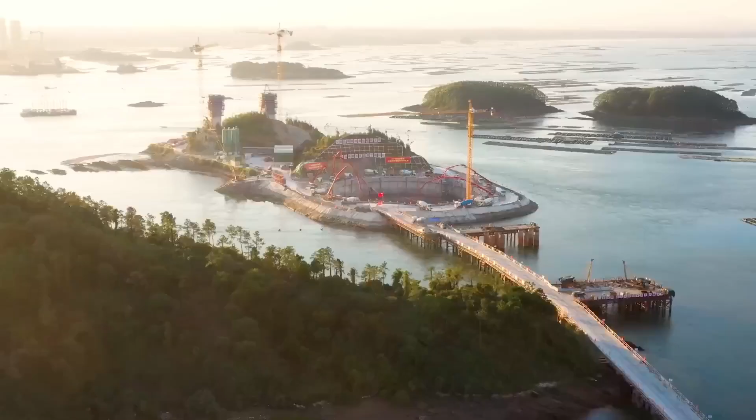In the 21st century, China has emerged as a global leader in infrastructure and engineering, achieving feats that have astonished even the most developed nations. Once plagued by the hardships of the century of humiliation, China has now risen to become an economic and technological powerhouse, transforming its cities and landscapes with massive construction projects.

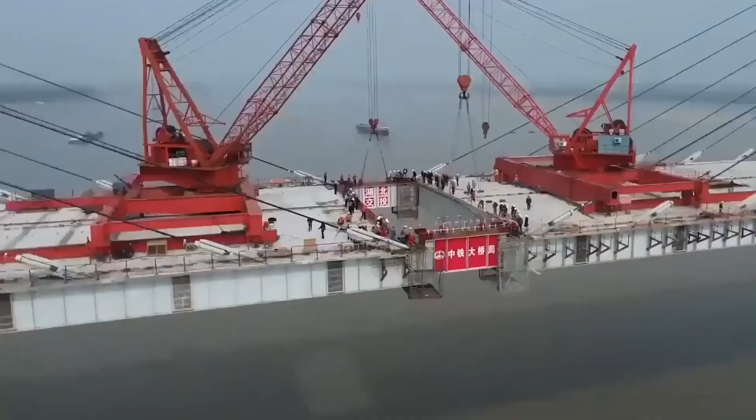Former U.S. President Donald Trump even acknowledged China's superiority in infrastructure, admitting that America could never compete with China's advanced roads, bridges, and urban development. But is this reputation well-earned? Is China truly surpassing the West in engineering and technological innovation, or is it just an illusion created by grandeur and large-scale projects?

To answer this, one of the most groundbreaking projects to examine is the Shenzhen-Zhongshan Link, a massive infrastructure development that features bridges, artificial islands, and one of the world's longest underwater tunnels. This 24-kilometer megastructure is not just a testament to China's ability to construct monumental projects, but also a symbol of its commitment to economic growth, regional integration, and technological advancement.

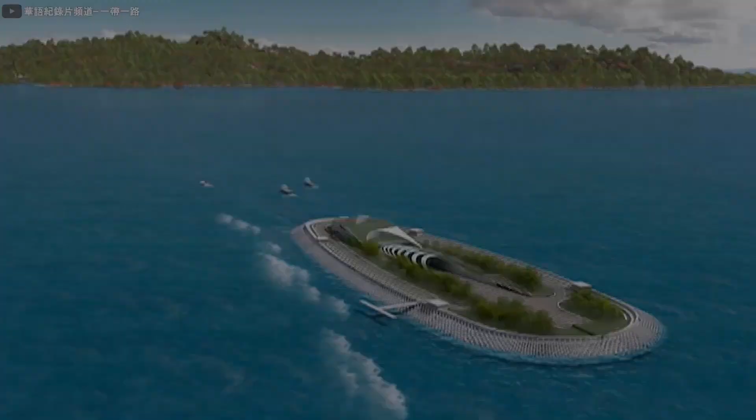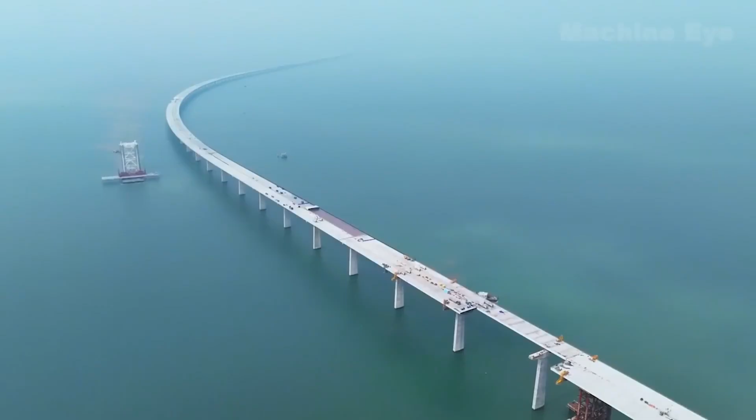The Shenzhen-Zhongshan Link is a vital part of the Guangdong-Hong Kong-Macau Greater Bay Area, a region that aims to become one of the most important economic hubs in the world. China is home to some of the world's busiest and fastest-growing cities, and Shenzhen is one of its most important economic powerhouses. Often referred to as China's Silicon Valley, Shenzhen is a global leader in technology, finance, and manufacturing, housing some of the biggest companies in the world, such as Huawei, Tencent, DJI, and BYD.

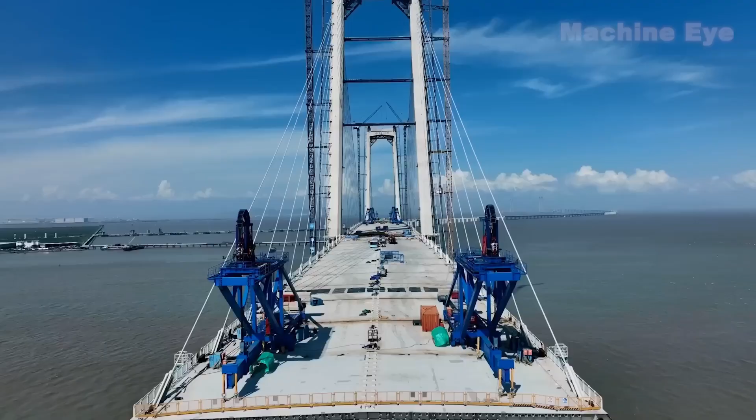It is also home to the Shenzhen Stock Exchange and a booming fintech sector. The city plays a critical role in international trade, with its ports processing massive cargo volumes and serving as an essential link in global supply chains. As a rapidly growing metropolis, Shenzhen requires efficient and modern transportation networks, which is why the Shenzhen-Zhongshan Link is so significant.

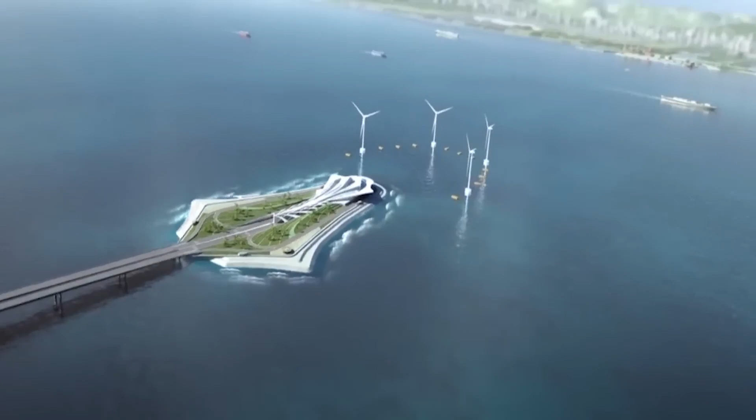On the other side of the Pearl River Delta, Zhongshan is an equally vital player in China's industrial landscape. While Shenzhen is known for its high-tech industries, Zhongshan is a key manufacturing and trade hub, specializing in machinery, home appliances, and precision equipment. The city is home to over 30,000 industrial enterprises, many of which are deeply integrated into global supply chains. Zhongshan is also undergoing rapid modernization as part of the Greater Bay Area initiative, attracting new businesses and infrastructure investments.

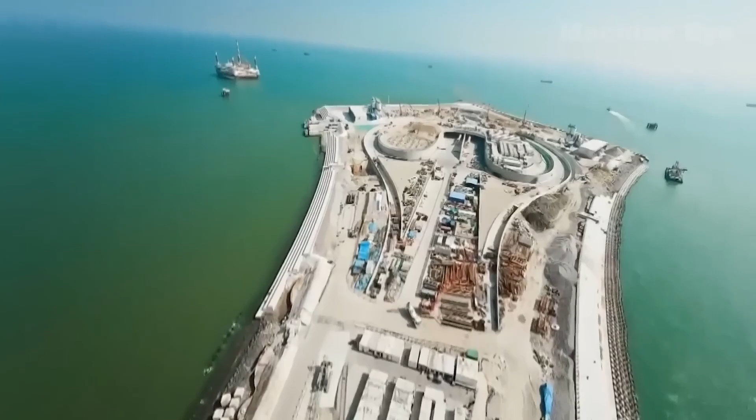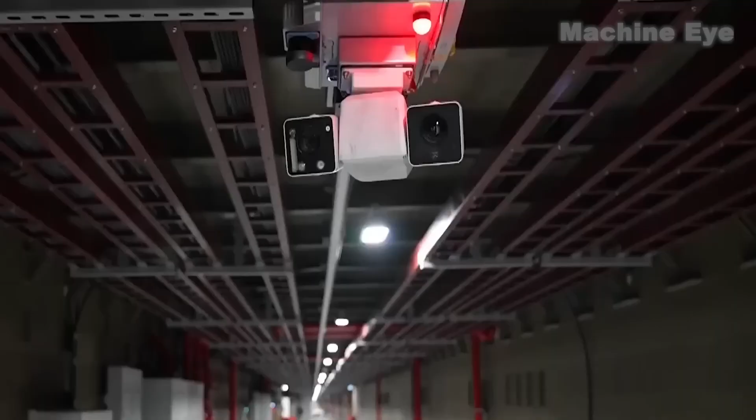However, the lack of a direct connection between these two economic hubs has been a major challenge. Before the construction of the Shenzhen-Zhongshan Link, the primary travel routes between the two cities included the Humen Bridge or ferries, both of which were heavily congested. The long travel times of 2 to 3 hours created logistical bottlenecks for businesses and daily commuters. The new link cuts this travel time to just 30 minutes, significantly enhancing commerce, reducing transportation costs, and strengthening economic ties within the Greater Bay Area.

The sheer scale and complexity of the Shenzhen-Zhongshan Link make it an engineering marvel. The project consists of a 17-kilometer bridge system extending across the Pearl River estuary, featuring 2 massive artificial islands that serve as key transition points. From there, the structure descends into a 6.8-kilometer underwater tunnel, making it one of the longest and most advanced immersed tunnels in the world. What makes this tunnel even more unique is the integration of a submarine interchange, an unprecedented engineering feat that allows vehicles to seamlessly shift routes while underwater. This is the first of its kind in large-scale civil engineering.

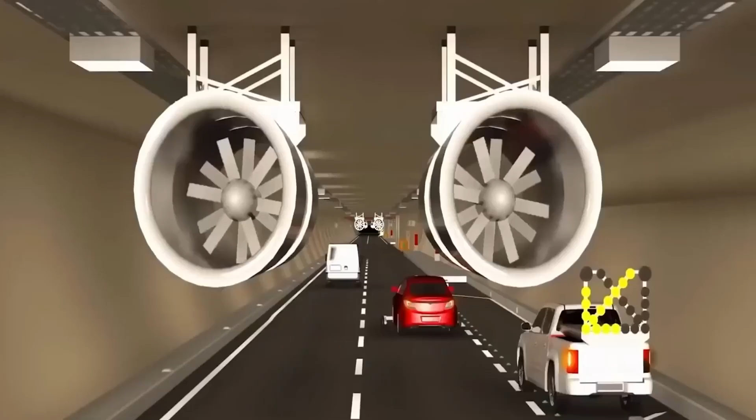The construction of the Shenzhen-Zhongshan Link required some of the most advanced engineering solutions ever deployed in infrastructure development. The underwater tunnel is composed of 32 massive prefabricated concrete segments, each weighing over 80,000 tons. These segments were carefully submerged and aligned on the seabed with millimeter precision. To ensure long-term durability, engineers incorporated seismic-resistant technology capable of withstanding extreme environmental conditions, including typhoons, strong tides, and potential earthquakes. Given the frequent geological activity in the Pearl River Delta, this was a crucial consideration.

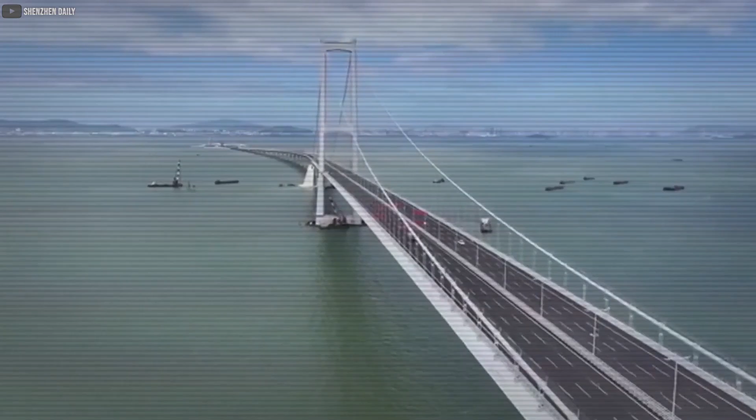Beyond its structural components, the artificial islands serve multiple purposes. In addition to facilitating the transition between bridges and the underwater tunnel, these islands house essential infrastructure such as emergency response centers, toll stations, and logistics hubs. Sustainability has also been a major focus of the project. To minimize the ecological impact on the Pearl River Delta's fragile marine ecosystem, engineers employed noise reduction materials and environmental protection measures throughout the construction process.

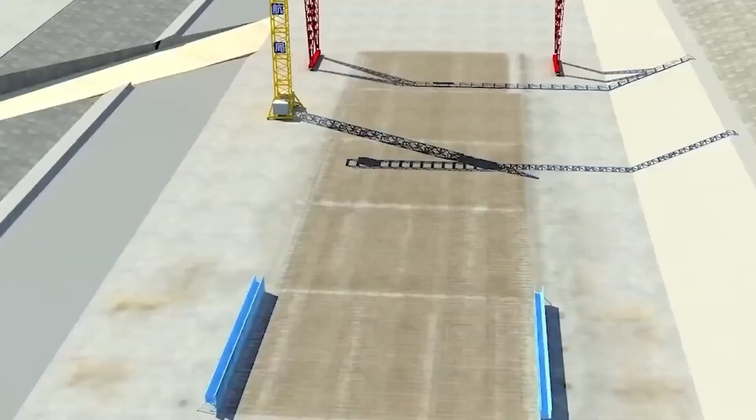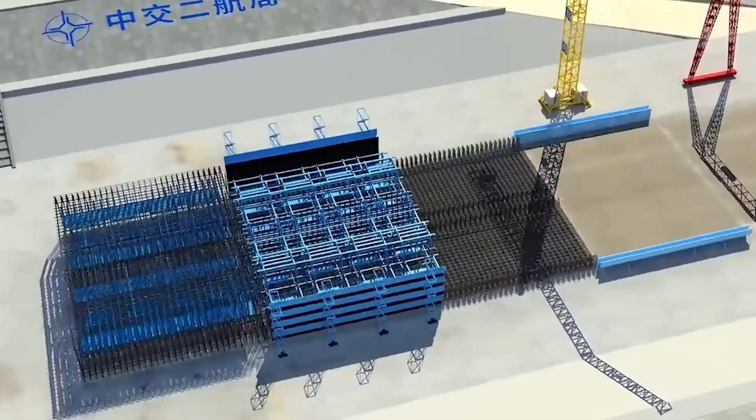The Shenzhen-Zhongshan Link is a testament to China's ability to push the boundaries of engineering, integrating cutting-edge technology, sustainability, and urban planning into a single megastructure. The undersea tunnel, in particular, is a technological breakthrough, redefining the limits of marine engineering and tunnel construction. Stretching 6.8 kilometers beneath the Pearl River estuary and buried at depths of over 40 meters, it stands as one of the most ambitious underwater infrastructure projects ever attempted. Designed with 4 lanes in each direction, it far surpasses the capacity of the Hong Kong-Zhuhai-Macau Tunnel.

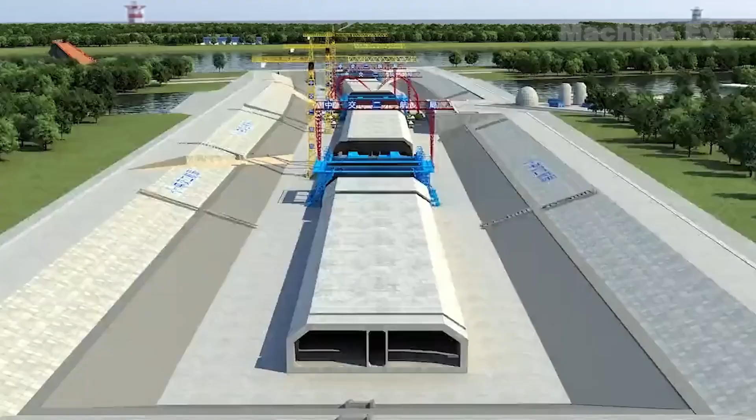Building an undersea tunnel of this scale presented enormous challenges, particularly in ensuring airtight connections between segments in a high-pressure underwater environment. Even a minor leak could compromise the tunnel's long-term durability. Engineers tackled this issue by designing precision-machined steel gaskets combined with high-performance elastic sealing materials, ensuring vacuum-tight seals between segments.

Each segment, measuring 165 meters in length, 46 meters in width, and 10.6 meters in height, was meticulously aligned using a floating docking system with a 2 mm margin of error, surpassing conventional tunnel construction standards.

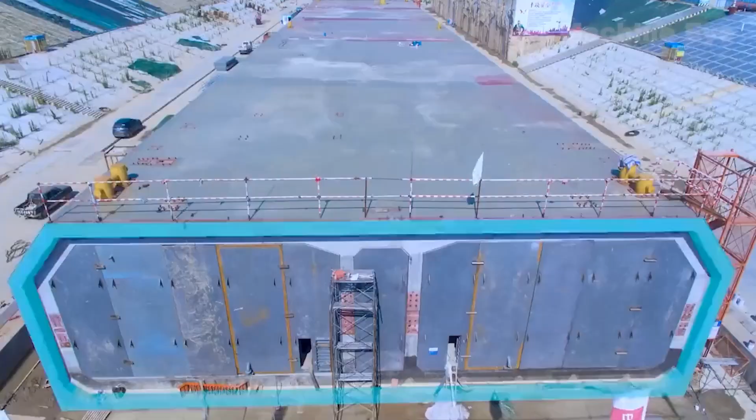Another major challenge was ensuring seismic resilience. Since the Pearl River Delta is prone to geological activity, traditional expansion joints were deemed too vulnerable. To address this, engineers introduced highly flexible, seismic-resistant expansion joints that allow the tunnel to absorb and dissipate seismic energy effectively.

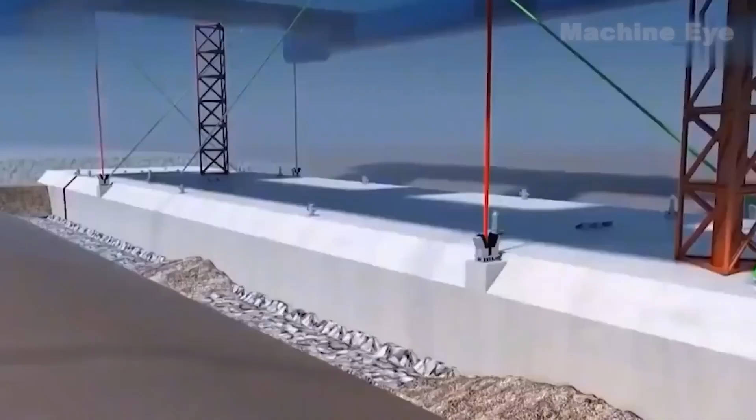In addition to structural resilience, the tunnel also incorporates an advanced air purification and ventilation system, featuring HEPA filters and real-time carbon dioxide monitoring sensors. These innovations help maintain air quality inside the tunnel at levels comparable to outdoor conditions.

The Shenzhen-Zhongshan Link is more than just a transportation corridor. It is a bold statement of China's engineering ambitions. This project has defied Western skepticism, proving that large-scale, high-tech infrastructure can be built with precision, resilience, and sustainability.

By successfully overcoming complex engineering challenges, China has once again demonstrated its ability to execute monumental projects that redefine global infrastructure standards. As the Shenzhen-Zhongshan Link nears completion, it stands as a symbol of the country's ongoing commitment to economic growth, technological progress, and regional connectivity.

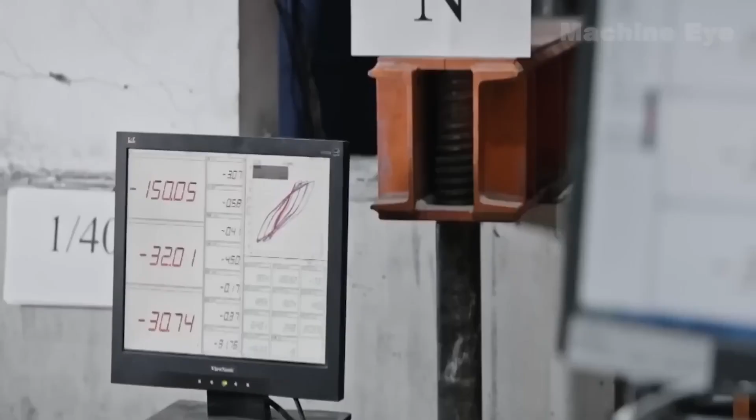The Shenzhen-Zhongshan Undersea Tunnel is a marvel of engineering, operating in a seismically active zone. To counteract buoyancy forces, engineers implemented an anti-buoyancy foundation system using a combination of deep-sea anchor piles and ultra-dense reinforced concrete. Given that each submerged segment weighs more than 80,000 tons, keeping them stable without external displacement was critical.

Compared to the Hong Kong-Zhuhai-Macau Bridge Undersea Tunnel, where anti-buoyancy was managed with traditional ballast systems, the Shenzhen-Zhongshan Link's approach provides 40% greater stability against shifting seabed conditions. Moreover, the estuary experiences some of China's strongest tidal currents, with speeds reaching 2.5 meters per second.

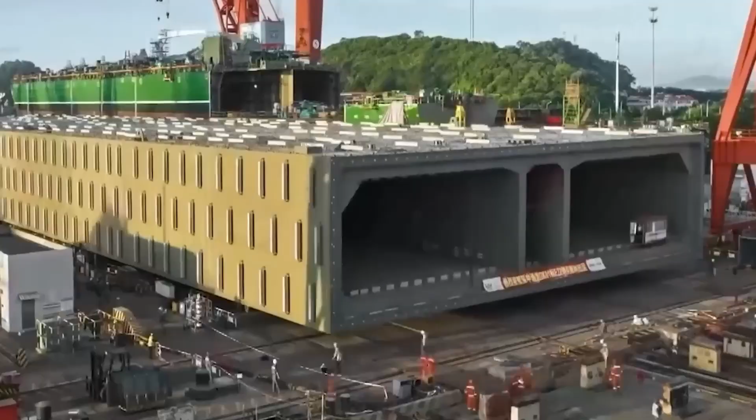To protect the tunnel from erosion and shifting seabed conditions, engineers used an advanced sediment stabilization system integrating reinforced geotextile layers and dynamically adaptive breakwaters. This ensures that underwater currents do not gradually weaken the tunnel's foundation over time, a common issue in submerged infrastructure projects like the Øresund Bridge Tunnel between Denmark and Sweden.

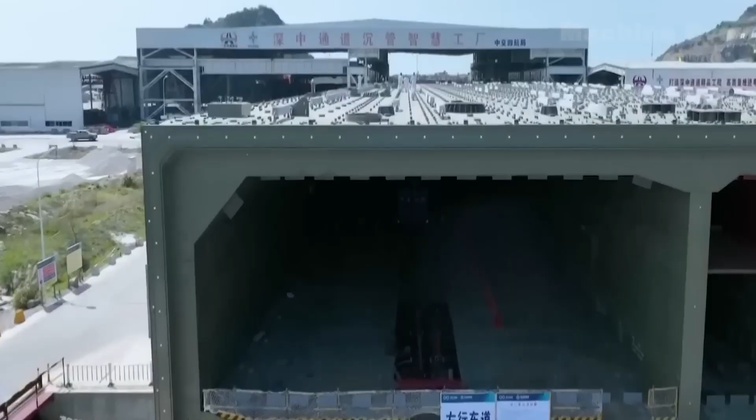What truly sets this tunnel apart, however, is its unprecedented technological sophistication. At its core lies a groundbreaking smart monitoring system integrating 23,000 fiber optic sensors directly into the tunnel's concrete structure. These sensors provide real-time stress, strain, and temperature data, allowing engineers to detect microfractures, monitor load distribution, and predict structural fatigue before it becomes a safety risk.

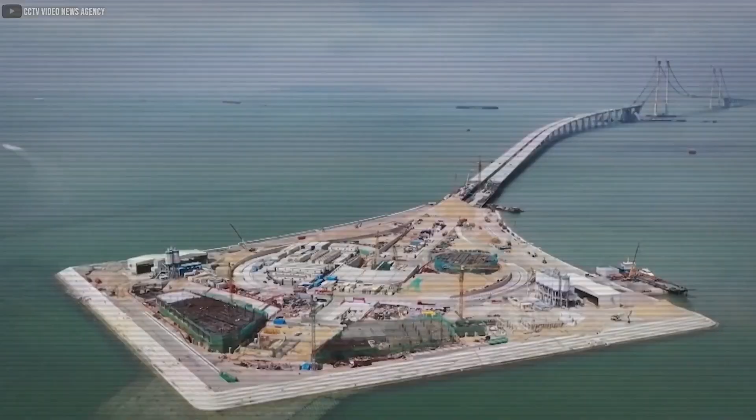This level of continuous automated health monitoring is a first for undersea tunnel construction and enhances long-term durability by enabling preemptive maintenance before major issues arise. The precision and sensitivity of this monitoring system are unparalleled. The fiber optic sensors embedded within the tunnel boast a 40% higher sensitivity than comparable systems used in the West.

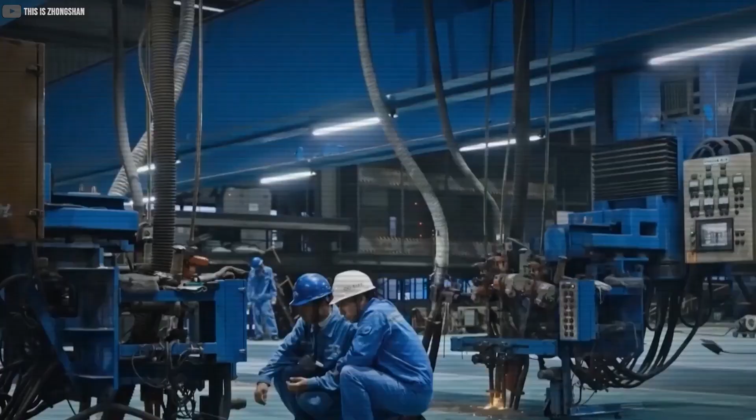This allows for more accurate and immediate data collection, effectively making the concrete think. This feat is so revolutionary that it was recognized by the prestigious journal Nature. The integration of smart sensing technology into traditional concrete structures transforms the tunnel from a static passageway into a self-diagnosing, self-reporting structure, significantly reducing maintenance costs and extending its lifespan.

Beyond its sheer scale and technological breakthroughs, the Shenzhen-Zhongshan Undersea Tunnel also sets a new benchmark in environmental protection and human safety. Given the ecological sensitivity of the Pearl River estuary, home to diverse marine life including the endangered Chinese white dolphin, engineers implemented low-noise construction techniques to minimize underwater sound pollution.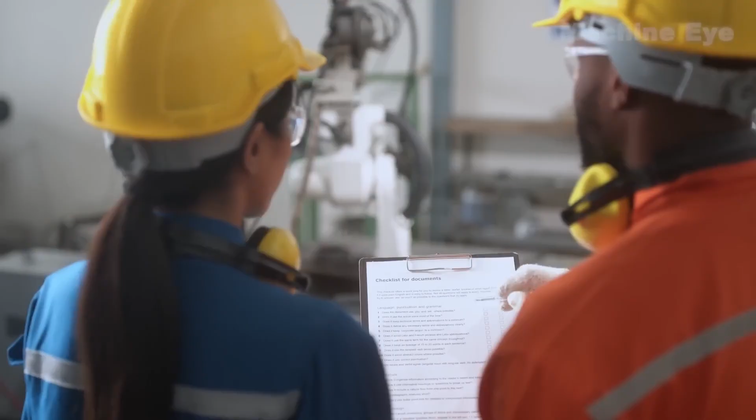They pioneered a steel-concrete composite structure, combining the best of both worlds. The steel shell provided superior tensile strength and flexibility, preventing cracks from propagating through the structure, while the concrete core enhanced compression resistance, ensuring the tunnel could withstand the staggering weight of ocean water above.

This combination resulted in a 400% increase in flexural rigidity, meaning the tunnel was 4 times more resistant to bending and deformation compared to conventional designs. This steel shell concrete structure was a complete reimagining of how undersea tunnels are built.

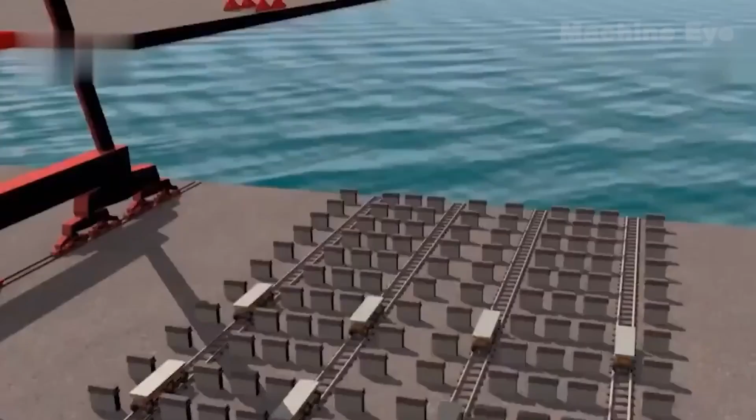Traditional reinforced concrete requires extensive manual labor, making large-scale projects more time-consuming and error-prone. The new steel-concrete hybrid design dramatically reduced labor intensity, allowing prefabricated segments to be built with millimeter precision before being submerged and connected on the seafloor.

This breakthrough did more than silence skeptics. It set a new benchmark for tunnel engineering worldwide. By demonstrating that an 8-lane bidirectional undersea tunnel was not only feasible but structurally superior to previous designs, China effectively rewrote the rules of large-scale marine infrastructure.

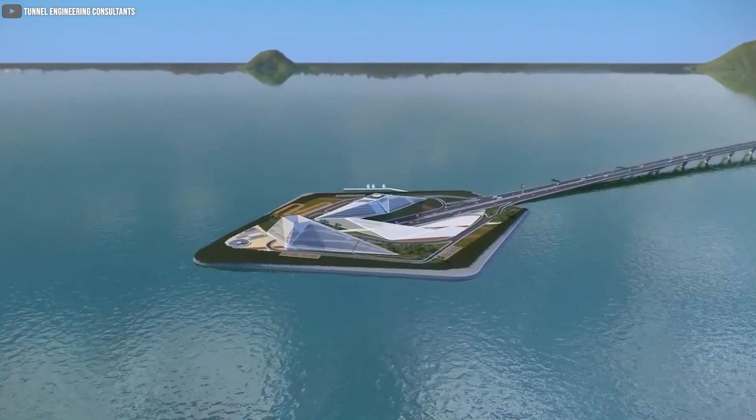This tunnel doesn't just connect 2 cities. It ushers in a new era of supermassive underwater infrastructure. To get a better sense of how impressive this tunnel is, we need to take a look at the tunnel's precision parameters, precision manufacturing, and assembly.

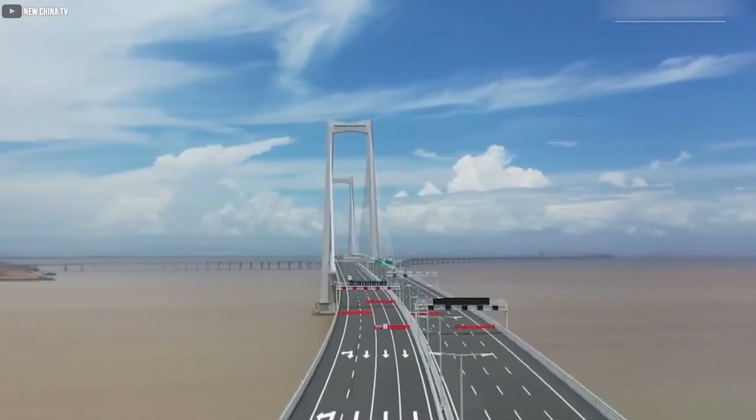The Shenzhen-Zhongshan Undersea Tunnel is a masterclass in precision manufacturing and automated assembly, pushing the boundaries of what is possible in subsea infrastructure. Traditional tunnel construction often relies heavily on manual labor, but for a project of this magnitude, even microscopic deviations in construction could lead to structural weaknesses over time.

To ensure unmatched durability and precision, China implemented an automated production process that surpassed even the most rigorous international engineering standards. At the heart of this operation was a highly automated production line where steel plates were precision-cut and robotically welded with an accuracy level never before achieved in immersed tunnel construction.

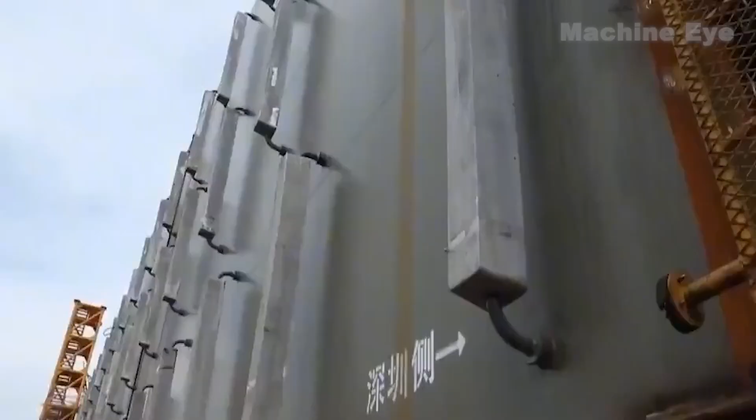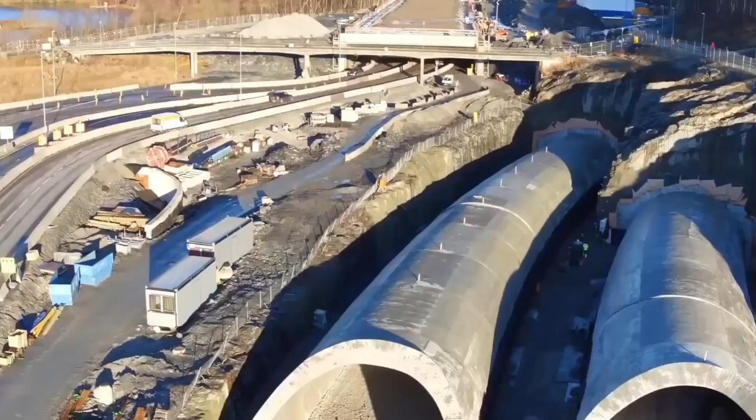The welding accuracy of 0.02 mm exceeded the German DIN 6700 standards, one of the world's most stringent quality benchmarks, by an astonishing 22%. This was a major breakthrough, as even a 0.1 mm deviation in tunnel segments could create misalignments that would compromise the structural integrity of the entire tunnel over time.

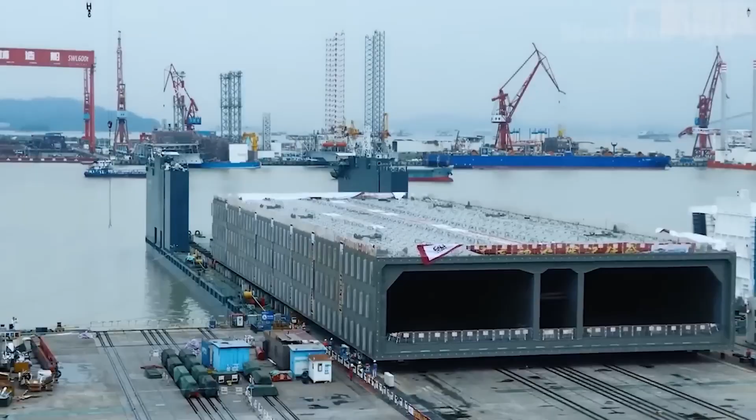To achieve this ultra-high precision, engineers employed laser-guided cutting systems to ensure millimeter-perfect steel plate dimensions. They also put to use automated robotic welding arms capable of applying consistent, high-strength welds without human error. Real-time AI monitoring systems also detected microscopic inconsistencies, allowing immediate corrections.

By eliminating human-induced welding imperfections, this approach dramatically improved the durability of the tunnel, ensuring that it could withstand extreme pressures for decades without significant maintenance. Given the sheer scale of the tunnel, a single continuous structure was impractical.

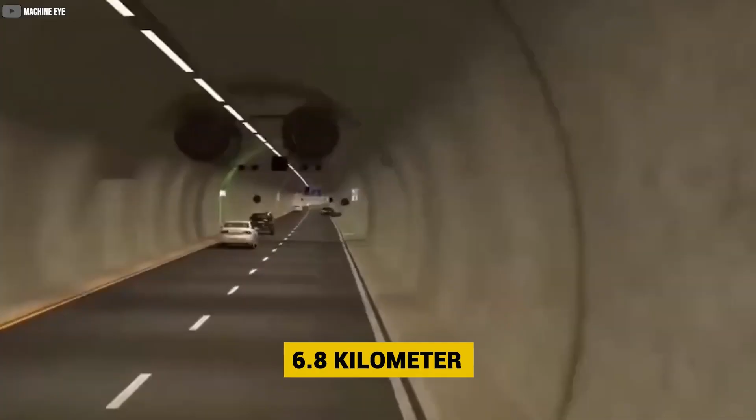Instead, engineers employed a segmented tube construction method, dividing the tunnel into 32 giant prefabricated segments, each weighing tens of thousands of tons. These segments were meticulously constructed off-site under controlled conditions before being transported and assembled underwater. To ensure flawless integration of these massive tunnel sections, the assembly process relied on gantry cranes capable of lifting and positioning entire tunnel segments with sub-millimeter precision.

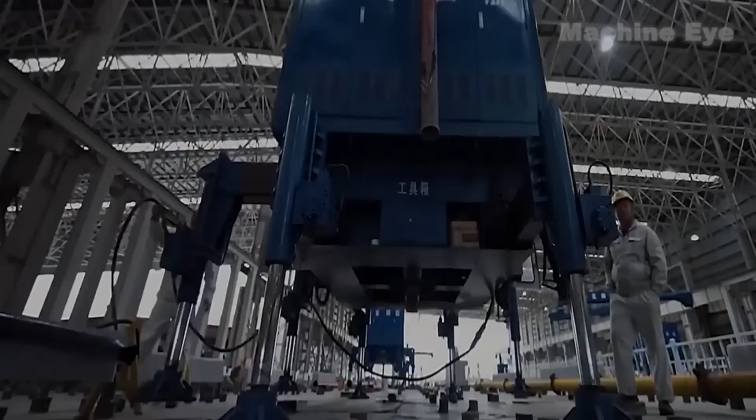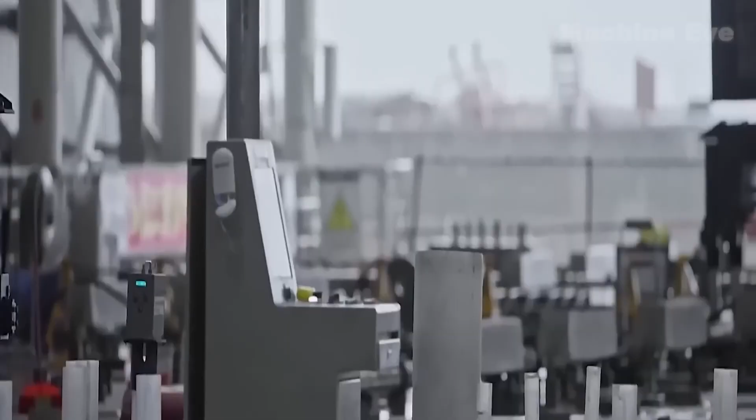Automated machinery also ensured that each segment was perfectly aligned before being permanently joined. Moreover, vacuum-sealed alignment systems eliminated even the slightest gaps between segments, reducing structural stress points. Each segment had to be airtight and watertight, as even a hairline fracture could allow seawater infiltration, jeopardizing the entire project. To mitigate this risk, engineers used custom-engineered high-pressure gaskets between tunnel sections, ensuring that the connections were as strong as the tunnel walls themselves.

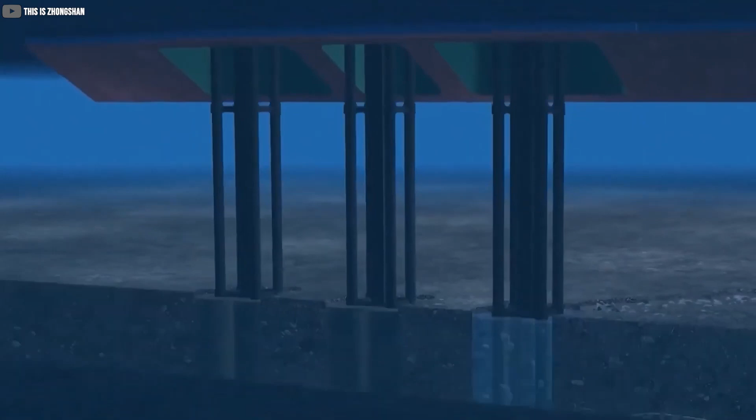The precision achieved in welding, cutting, and assembly has demonstrated that fully automated, AI-driven megaprojects are not just possible but superior to traditional manual construction methods. In this context, the Shenzhen-Zhongshan Link, a crucial passage connecting Shenzhen to Zhongshan in the Greater Bay Area, offers a glimpse into the next era of engineering innovation.

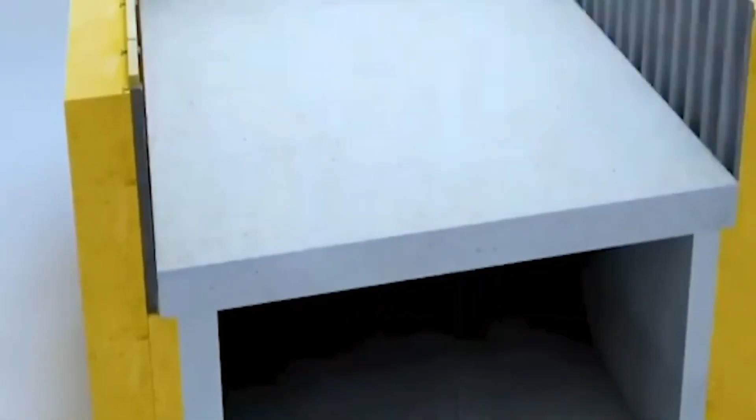Built to last 100 years, the tunnel is designed to endure severe marine conditions, high hydrostatic pressures, and continuous exposure to corrosive seawater. Achieving such an extended lifespan required groundbreaking innovations in corrosion resistance, structural protection, and self-maintenance.

One of the greatest challenges of underwater tunnel construction is the constant exposure to saltwater-induced corrosion, which can weaken metal and concrete over time. To counteract this, engineers developed a 5-layer anti-corrosion coating, drawing inspiration from shark skin, a natural surface known for its resistance to microbial growth, self-cleaning properties, and durability.

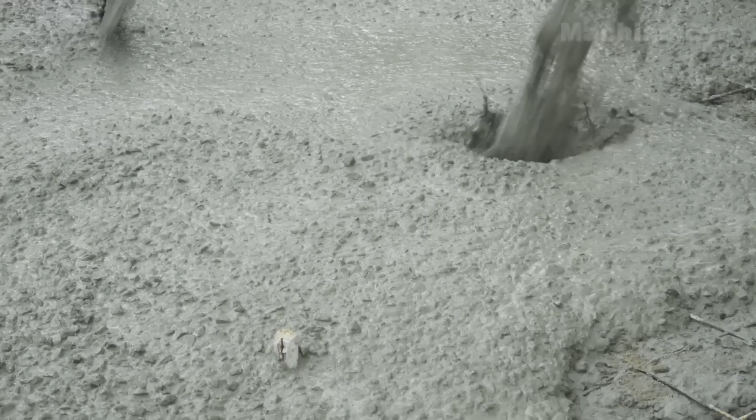The tunnel's 5-layer anti-corrosion system is a groundbreaking innovation designed to withstand the harsh marine environment and ensure longevity. At its core, the epoxy resin primer forms the first line of defense, creating an initial waterproof seal that prevents moisture from penetrating the structure.

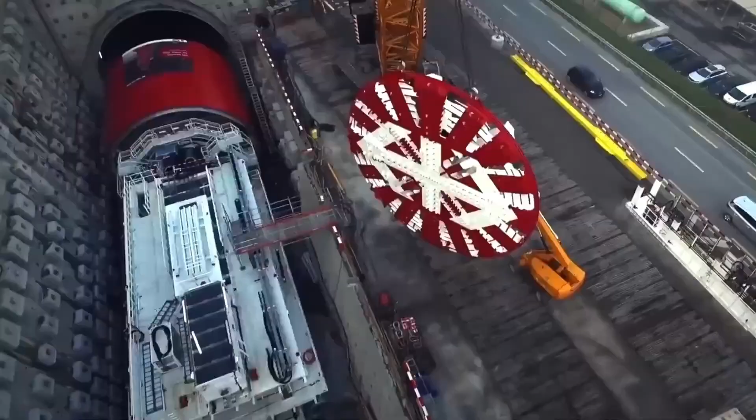This is followed by a polyurethane barrier layer, which is specifically engineered to absorb mechanical stress and prevent cracks caused by temperature fluctuations. To reinforce the surface against abrasion, high-speed tidal currents, and saltwater erosion, engineers incorporated a ceramic nanocoating, which significantly enhances durability compared to traditional anti-corrosion treatments.

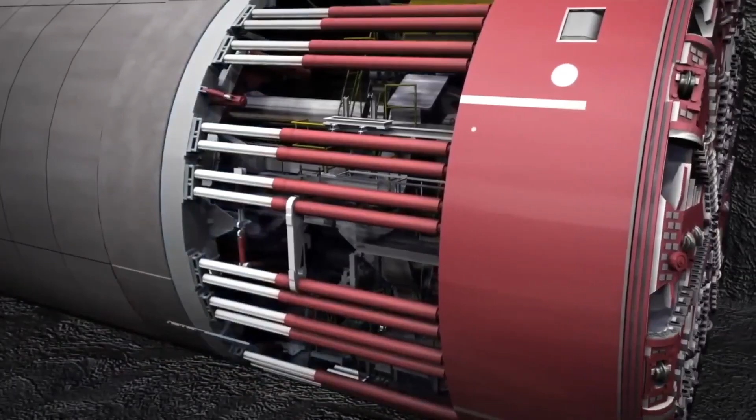Adding another layer of resilience, the hydrophobic fluoropolymer film repels water and oil, mimicking the natural water-shedding properties of lotus leaves to reduce long-term material degradation. The most advanced component of this system is the self-healing protective membrane, which uses microcapsule technology to autonomously repair minor scratches, microfractures, and surface wear before they expand into structural vulnerabilities.

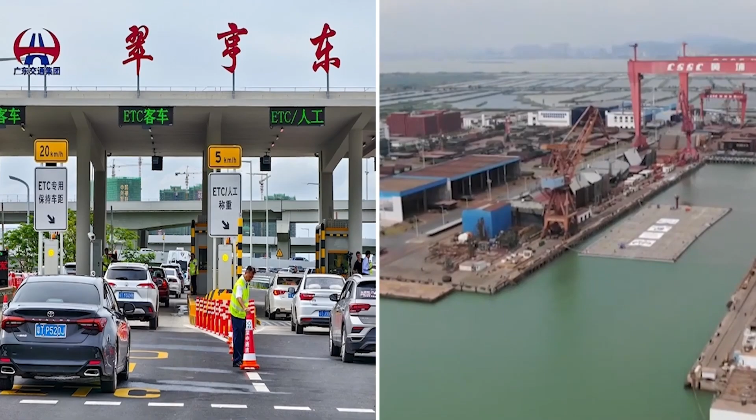This biomimetic approach ensures that the tunnel remains highly resistant to rust, salt damage, and structural degradation for at least a century. The Shenzhen-Zhongshan Undersea Tunnel is monitored in real time, ensuring that depleted anodes are replaced before they lose effectiveness. This dual-layer protection of chemical coatings and sacrificial anodes ensures that no exposed steel in the tunnel is ever at risk of rusting.

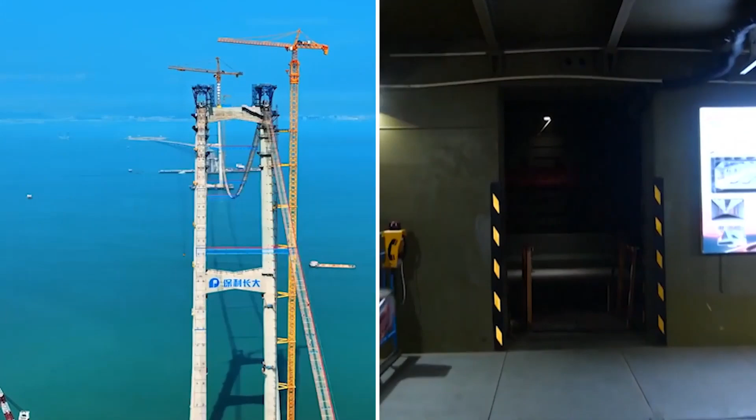Moreover, in any marine environment, underwater structures are prone to biofouling, which is the accumulation of algae, barnacles, and bacteria that can degrade surfaces over time. To combat this, engineers implemented an advanced surface treatment system that provides the tunnel with self-cleaning capabilities.

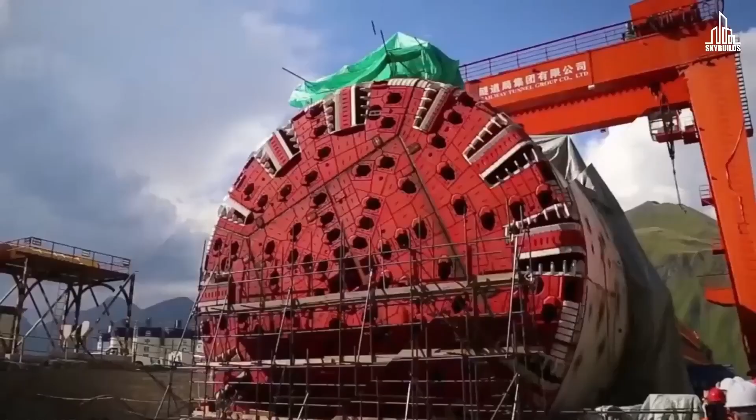The hydrophobic fluoropolymer layer on the outermost surface prevents organic matter from adhering to the tunnel walls. A low-friction antimicrobial coating disrupts bacterial growth, preventing biofilm formation. On top of this, electrically charged nanocoatings create a subtle repelling force that deters barnacles and algae from attaching.

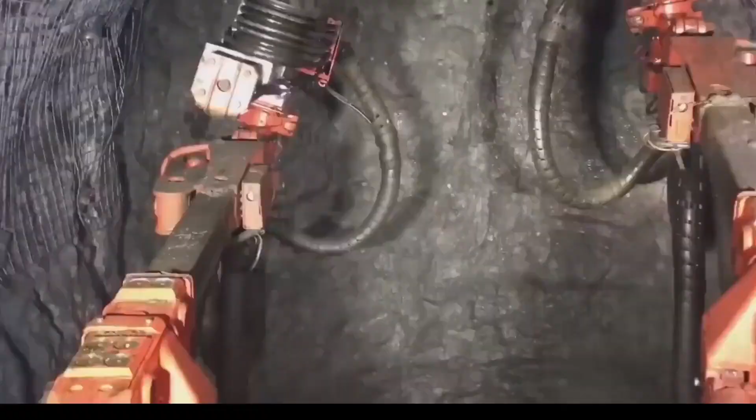These technologies ensure that the tunnel remains smooth, clean, and free of biological obstructions, preserving not just its appearance but, more importantly, its structural performance and water resistance. Together, these protective mechanisms take longevity to a whole new level.

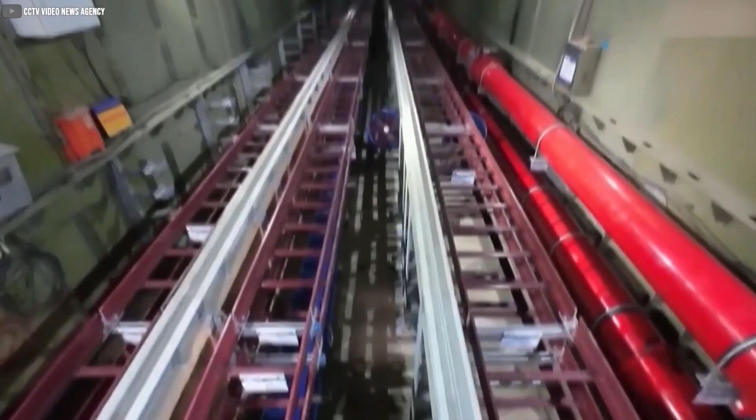Another area where the Shenzhen-Zhongshan Link pushes the boundaries of possibility is concrete engineering. Using cutting-edge robotics, real-time monitoring, and nanotechnology, the project redefines global standards for undersea infrastructure durability and resilience. Traditional concrete pouring methods are time-consuming and prone to human error, leading to uneven density, microcracks, and structural weaknesses over time.

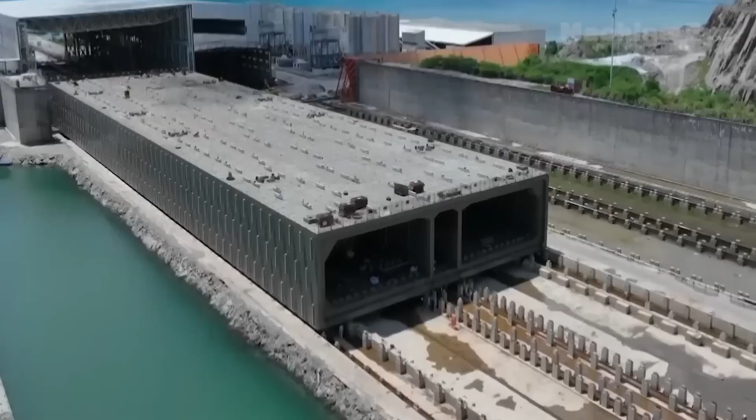To eliminate these risks, engineers developed a fully automated concrete pouring system utilizing robotic precision and real-time data analysis. Equipped with 1,200 embedded sensors, these robotic systems monitor flow rate and pressure to ensure consistent material distribution, temperature differentials to prevent thermal cracking, and hydration reactions to optimize curing times.

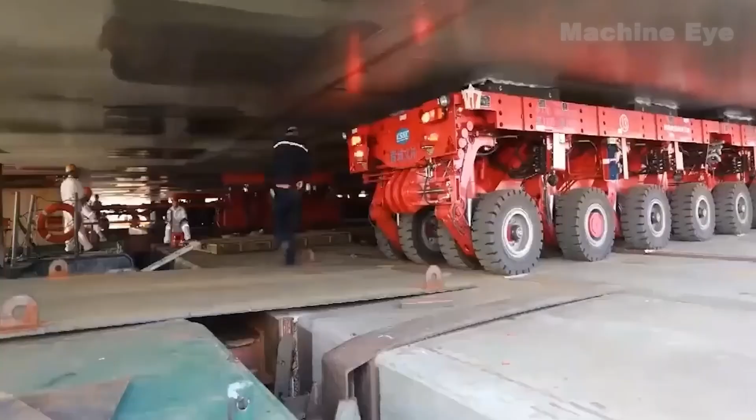This innovation reduces the traditional 90-day manual pouring and curing process to just 28 days, increasing efficiency by 68%, minimizing environmental exposure, and accelerating project timelines. The use of AI-driven monitoring ensures that the concrete is poured at the exact right consistency and temperature, eliminating air pockets and weak points before they form.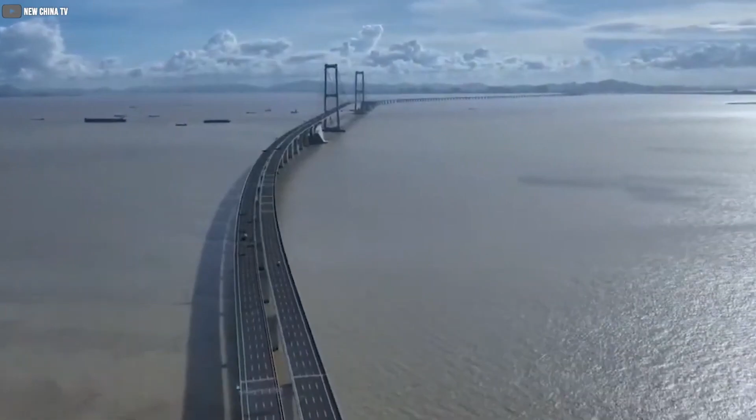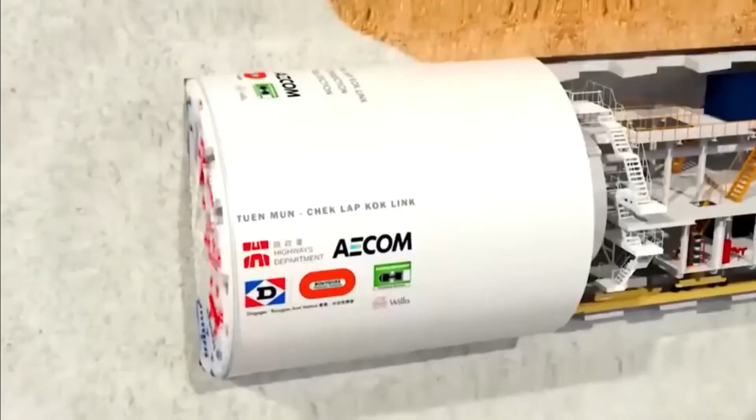A common challenge in large-scale concrete structures is achieving full compaction without structural gaps or voids. Conventional techniques rely on mechanical vibration, which can lead to uneven settling and long-term weakness. Instead, engineers introduced a zero manual vibration system utilizing self-compacting concrete, SCC, with nanometer-level flow control. SCC is engineered to be highly fluid yet structurally robust, allowing it to flow into every crevice without external force.

Its ultrafine particle composition ensures a 100% seamless bond between segments, reducing the risk of cracks, water seepage, and future deterioration. Moreover, the absence of mechanical vibration eliminates inconsistencies, ensuring that the entire tunnel structure is uniformly strong from the core to the outermost layers. This breakthrough enhances load-bearing capacity, ensuring that the tunnel can withstand immense external pressures, seismic forces, and long-term environmental stresses.

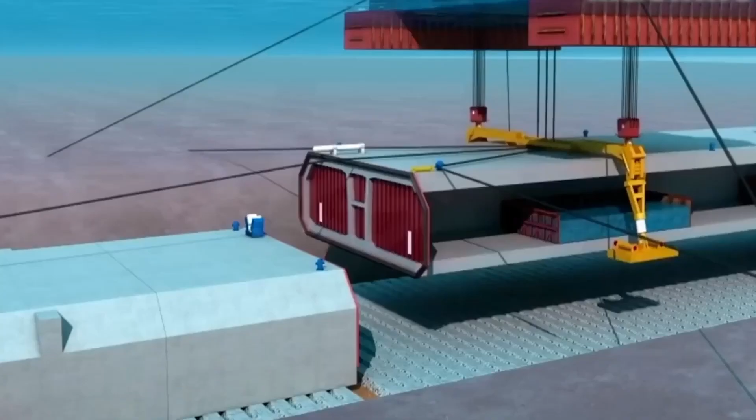A tunnel of this magnitude must endure some of the harshest environmental conditions on Earth, requiring rigorous durability testing beyond conventional engineering standards. The Shenzhen-Zhongshan Link underwent simulated stress tests that measured its resilience against a century of extreme natural disasters. Engineers subjected the tunnel materials to continuous high-velocity water currents and wind pressure simulations replicating the destructive forces of 1,000 Category 5 typhoons. The self-compacting concrete withstood hydrostatic loads without microfractures, proving its ability to survive extreme weather conditions.

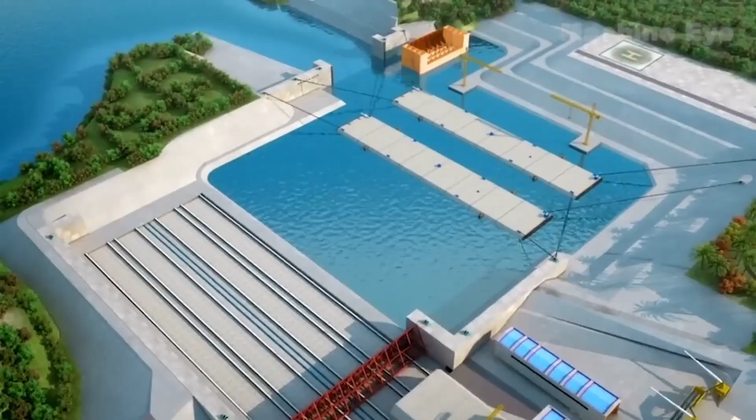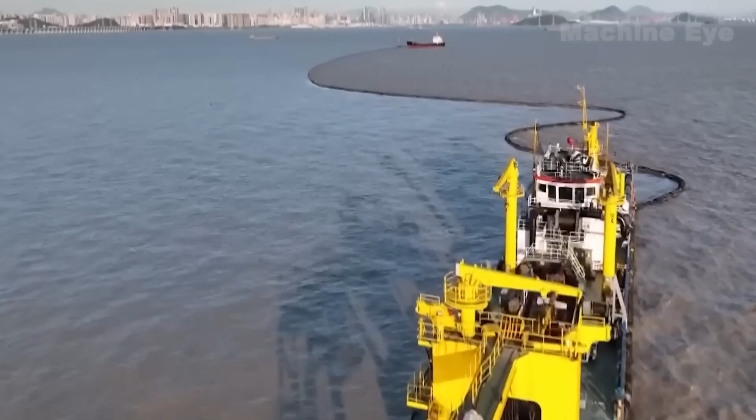The tunnel was also tested against Level 9 earthquake simulations, mimicking quakes stronger than those that devastated Fukushima and Sichuan. The high flexural rigidity of the steel-concrete composite ensured that no structural failure occurred, even under severe seismic stress. Additionally, engineers modeled future climate scenarios, exposing the tunnel to conditions mimicking a 3-meter rise in global sea levels. The tunnel's hydrophobic coatings and reinforced water barriers proved highly effective, ensuring it remained watertight under elevated pressures.

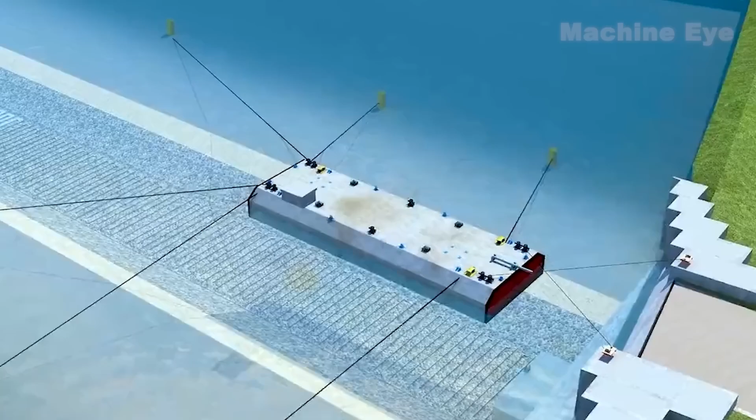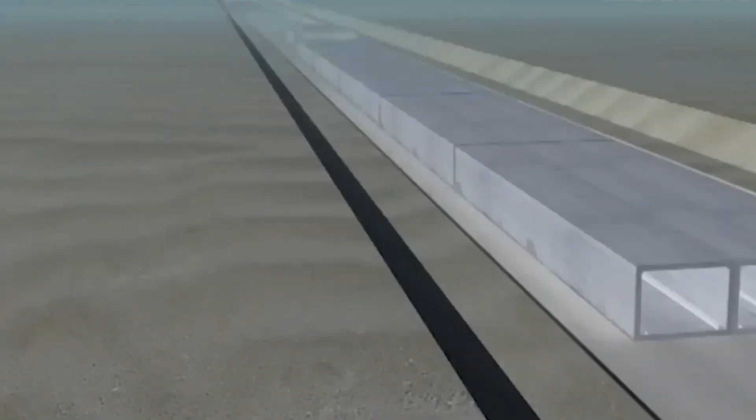These stress tests confirmed that the risk of catastrophic failure was reduced by 83%, far exceeding international safety standards and setting a new benchmark for long-term structural resilience in undersea construction. The success of the Shenzhen-Zhongshan Link hinges on China's revolutionary Smart Dream Factory, an AI-driven manufacturing hub, and a massive transport operation that moves 80,000-ton tunnel sections with near-military precision.

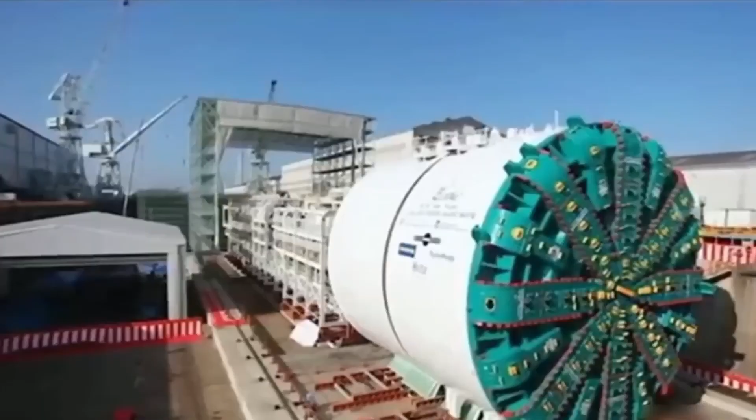To meet the immense structural demands of an 8-lane undersea tunnel, engineers turned to a fully automated AI-controlled prefabrication plant, nicknamed the Smart Dream Factory, where each tunnel segment is built with robotic precision. The prefabrication facility behind the Shenzhen-Zhongshan Link operates at an unprecedented level of efficiency, delivering one massive tunnel segment per month. This production rate is 25% faster than previous undersea tunnel projects.

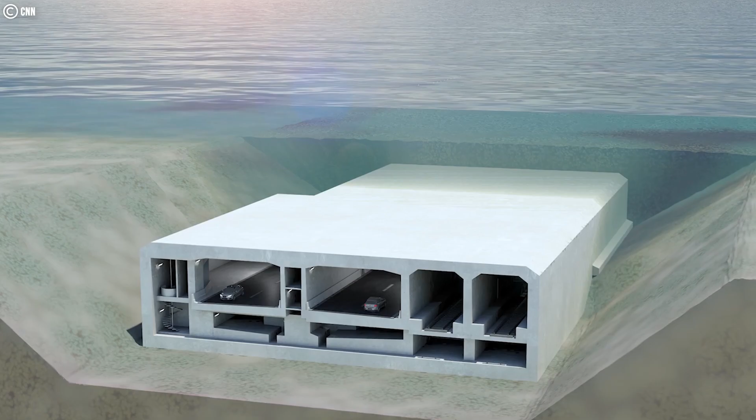This accelerated pace is achieved through a combination of advanced automation, optimized logistics, and precision engineering, ensuring that each segment meets exacting structural standards without compromising quality. Unlike conventional construction sites that are subject to weather fluctuations and environmental variables, these segments are manufactured in a fully climate-controlled environment where temperature and humidity are meticulously regulated. This precision-controlled process eliminates thermal expansion inconsistencies, premature drying, and micro-cracking, which are common issues in traditional concrete construction.

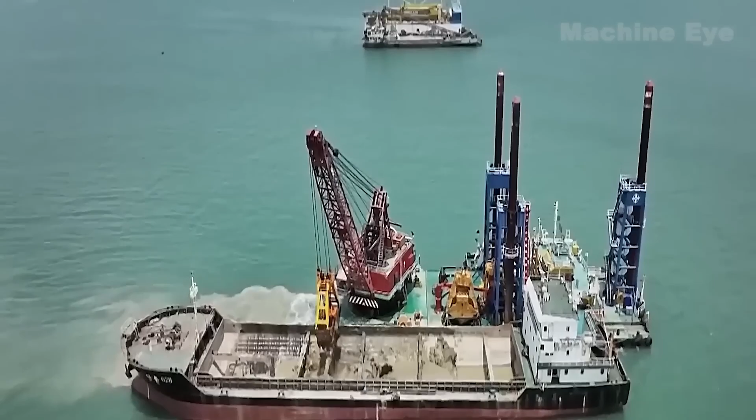By maintaining a uniform curing environment, engineers ensure that each segment achieves its full compressive strength and structural integrity, reducing the risk of long-term weaknesses that could compromise the tunnel's resilience under high-pressure underwater conditions. The Shenzhen-Zhongshan Link reflects China's ability to merge cutting-edge technology with large-scale logistics to create next-generation infrastructure.

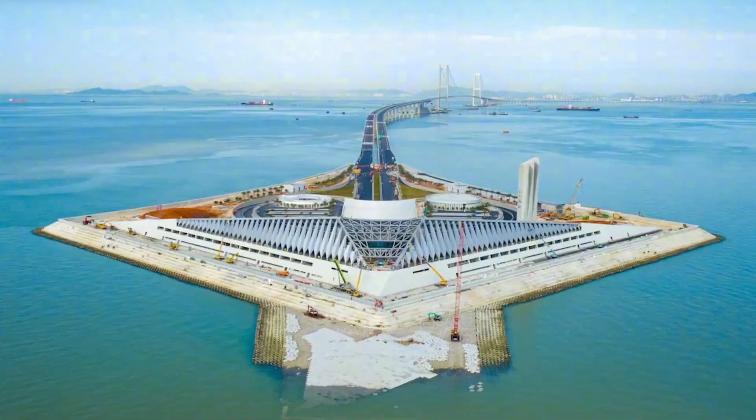The Smart Dream Factory's automated precision, groundbreaking transport system, and rigorous quality control showcase how China is pushing the frontiers of megaproject construction. This project sets a new global benchmark, demonstrating how automation, AI, and high-tech logistics can revolutionize infrastructure development. By setting new standards for efficiency, durability, and scale, China is proving that its infrastructure prowess is unmatched.